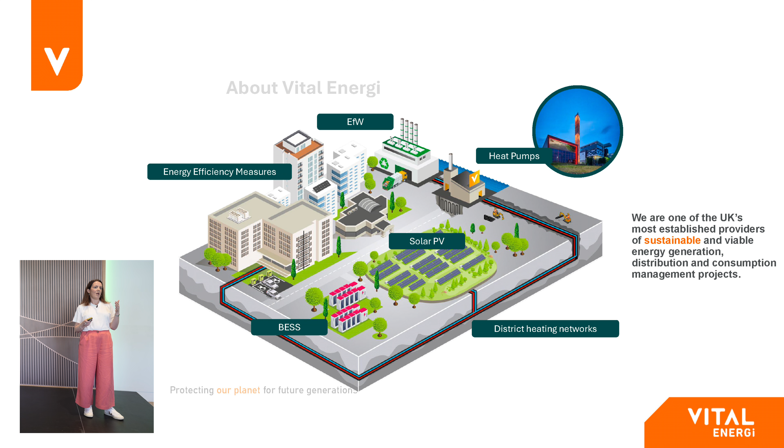We build heat pumps, or we're about to start. We design them, but we're about to start building them. We do solar PV. We're doing BESS. We install energy efficiency measures in buildings, and we own and operate an energy from waste plant in the Midlands, and we're about to start another one in the north of England.

So this is a very small selection of our projects, but it's just to give a bit of an indication of the types of projects and their distribution across the UK. So we've got Torry Heat Network, which is a heat network in Aberdeen, which is taking heat from an energy from waste plant run by Aberdeen Heat and Power. We've got the Queen's Quay Energy Centre in Clydebank, just outside Glasgow, which is Scotland's only river source heat pump.

We have Liverpool Waters, which is similar, so that's been installed by Peel and is another river source heat pump. So these are industrial sized heat pumps where the refrigerant is ammonia. The pumps are being built in Glasgow by a company called Star Refrigeration, and the energy centre has been designed by us. And our headquarters is in Blackburn, so a lot of the work and the IP and everything that's going on with heat is actually being done within the UK.

We've got a heat network in Wales called Dyffryn. We've just replaced that. That was an old heat network that was about 30, 40 years old, and we've gone in and completely replaced it. Our Leeds PIPES project is one of the fastest growing heat networks in the UK. So Leeds City Council started that project about 6 years ago, and we're now up to about 40 kilometres of pipe across the whole of Leeds, with a lot of the municipal buildings attached to it. So the Civic Hall, the Town Hall, the courts, Leeds Playhouse, St James's Hospital.

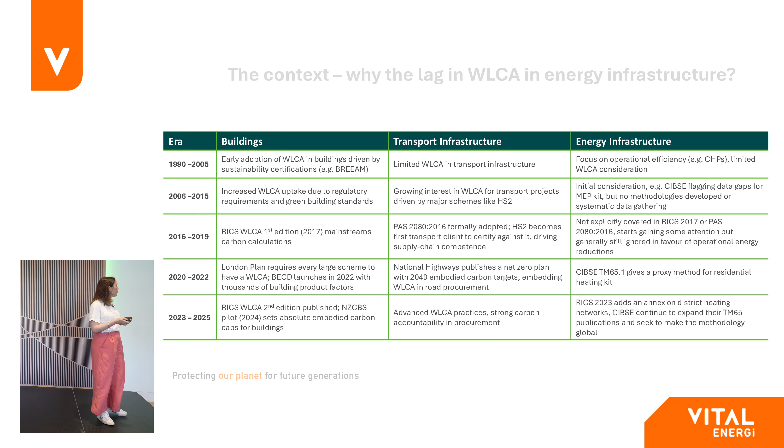But why does it matter? Again, operational energy is only one small part of carbon as a whole. A lot of the work that we do is for public sector organisations, so local authorities, hospitals, universities, and they've declared climate emergencies, they've set net zero targets, and they want to know about their scope 3. So just focusing on operational energy isn't enough.

However, obviously, when we're going in and delivering infrastructure that is going to remove fossil fuels and reduce their scope 1 and 2 to 0, then that operational energy bit might be huge, an order of magnitude bigger than the embodied carbon side of things. I'll come back to that later, but it is an important thing to bear in mind. So yes, it is important to know all of this, but for infrastructure that is decarbonising heat, the operational energy side of things is the end goal.

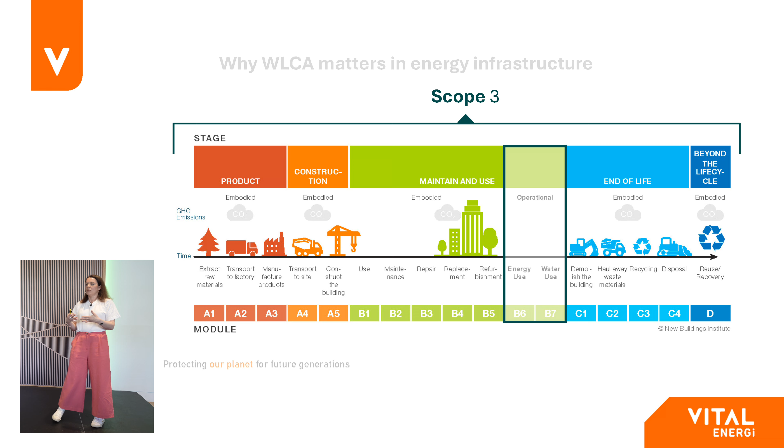But because that was the focus, there's not really been an awful lot of information gathering about all those other areas. So everything in A1 to B5, and then the C and D, and we really need that. We can't ignore it altogether. So we need that information.

So I'm going to talk a little bit about this specific project that we're doing for Lancaster University, because effectively, as I said, Vital have been doing this for 30 years, but no one had asked us for information about embodied carbon until 2 years ago. I started at Vital almost 2 years ago to the day, the 1st of July 2023. And then in August 2023, a tender came in from Lancaster, initially to build a solar farm, and then to deliver what they're calling the LUNZIP, the Lancaster University Net Zero Infrastructure Project.

And that was the first time that we had ever specifically been asked to do an embodied carbon assessment. So my question is, if we'd not been doing it, who is doing it? I think the answer is probably no one, really. But in that 2 years, we're now starting to see it come up, and probably most of the tenders that we're working on right now want some information about embodied carbon. But the problem is they've looked at RICS, they've looked at PAS 2080, they want a target, and we're like, well, actually, we can't really do that.

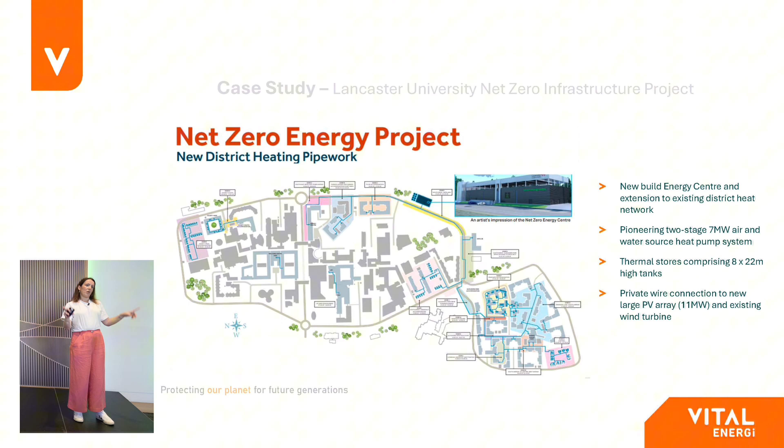Once they've done all of that, that will decarbonise 95% of the university campus, saving them something like 2,700 tonnes of carbon a year. But it's a massively ambitious project. It's sector leading for higher education, and it is really difficult to do a carbon assessment on, but we're trying.

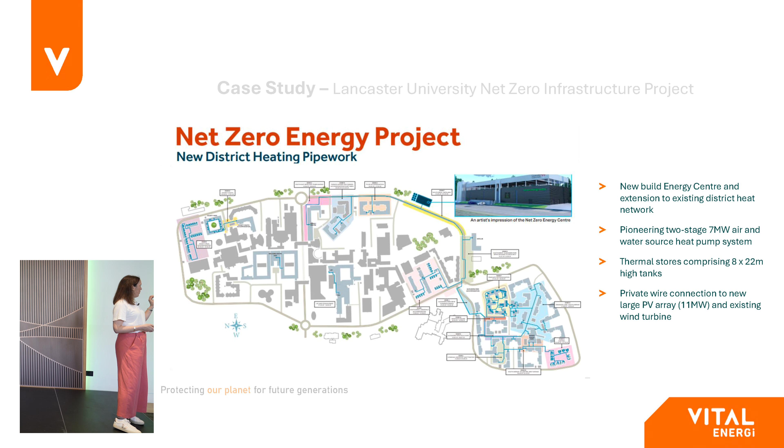When they came and asked us to do the carbon assessment for the solar farm, they said, we want to see case studies, we want to see examples. And we hadn't done it before, so we had to say, right, hands up, we've not done this before. So we appointed Arup to help us. Arup came in and helped us do the whole life carbon assessment for the solar farm.

But we recognised a need to upskill internally. We don't really want to be constantly relying on consultants to do this. But also, we've got over 100 design engineers within our own business. We're a turnkey provider. We should be doing this. We should have this knowledge and expertise. So we did a bit of market testing and identified One Click as the platform of our choice. I presented the case to the board, and they agreed, and that's when we got on board with One Click. That was probably around a year ago.

Since then we've been applying it to LUNZIP, but also some other projects as well. So we'll be doing it for Gatwick because they've got an ambition to become PAS 2080 certified as an asset owner. We are working for TfL, we're doing it for them. Who else are we doing it for at the moment? Yeah, there's lots. So it's really ramping up very, very quickly.

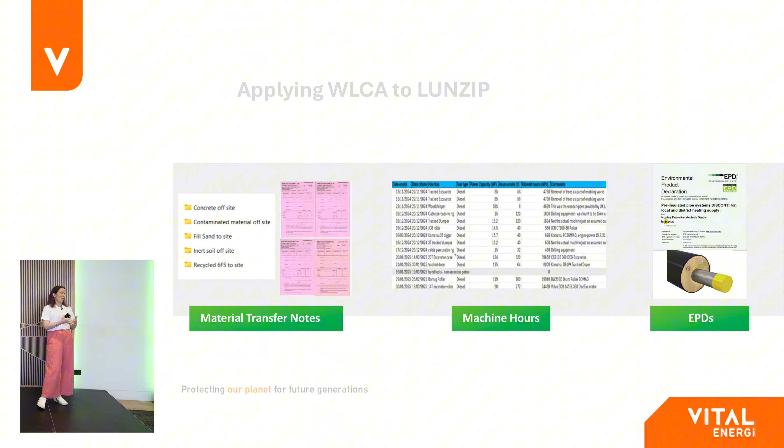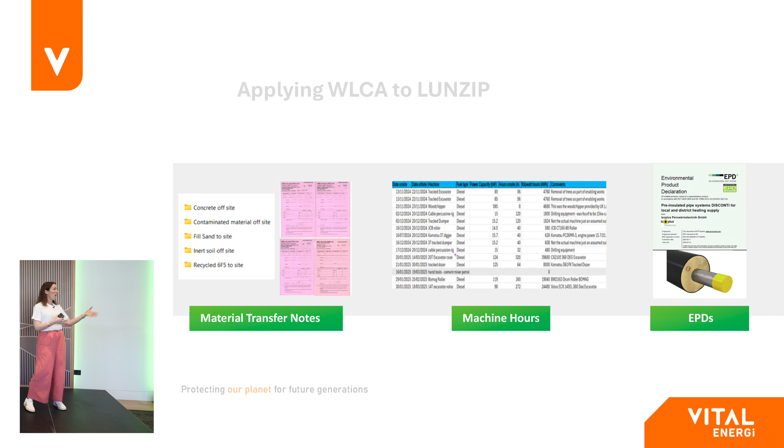And essentially what we're saying to them just now is we are only measuring this right now. Right now, we're just trying to understand where we are. So we're going to ask you for this information. You might not be able to give it to us right now, but we are going to ask you, and we're going to keep asking you. If you need help, come and ask us as the bigger contracting entity, and we will help you, or get help from someone else, whatever you do. But we're going to keep asking the question. This isn't going to go away.

So if you're not currently geared up to do this, then you need to get there, because although we're asking right now, there will come a point sometime in the future, probably not that far away, where we will be making decisions because we'll be forced to, because we might not get work if we don't do that. Recording machine hours is another thing that's a bit of a challenge, and EPDs, it's been talked about lots.

But we've had some really encouraging examples as well. So that EPD there is from Isoplus, who provide our pipe. And it turned out that they had EPDs for the exact product that we were buying from them, which was great, but it wasn't in the One Click library, but it will be now. So that's a big win. We're really chuffed with that.

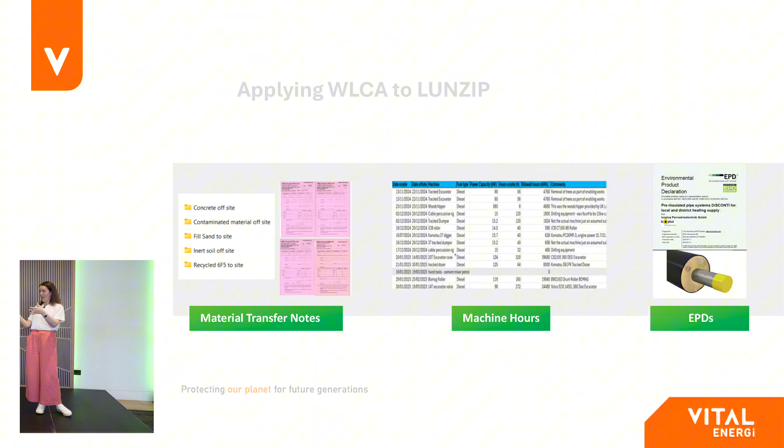And this is part of the challenge, because when we're looking at these things, we've not got to the point yet. We are putting the pipe work in the ground, and we've done the piling for the energy centre and the thermal store bases, but that's as far as we've got. So we're not into the energy centre and putting the MEP in and looking at the heat pumps and all of that sort of stuff. But we already know, because we've started to ask suppliers for this information, that very, very few of them have done the EPDs, and there aren't really that many in the library either for the specialised kit that we're using.

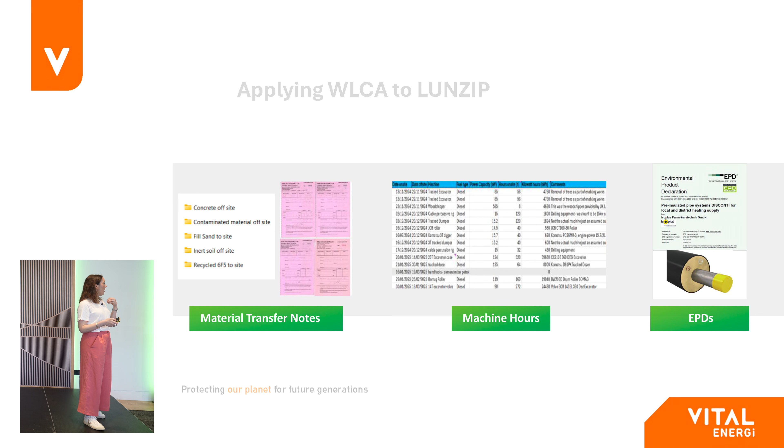So part of that raising the bar is this. We want there to be more, we want our work and our relationship with One Click to be generating more of this information that will go into the EPD library, that will go into the tool, that will go into developing the platform in a way that makes it better at doing the specific types of energy infrastructure projects that we are delivering. So that's our key challenges and lessons learned.

The data gaps for MEP, again, been talked about. Simon just talked about it earlier, RICS and the limitations of RICS. So there's a number, some of which have already been highlighted. So we have referred to RICS, but we are not using the pro forma because basically we can't. So things like the 60-year reference study period don't really work for us. We can apply them to the building.

We could apply them to the pipe work, arguably. But because it makes an assumption that you replace things like for like over the lifetime, there is absolutely no way that a heat pump that we're putting in now, with a 15 to 20-year lifespan, is going to be replaced by a like-for-like heat pump. That's just not going to happen. We are innovating heat pumps right now. We're working with Birmingham University to develop a new thermal store material that will basically be the size of this. So there's no point in doing an embodied carbon assessment that says this heat pump that I'm putting in now is going to be replaced 4 times in the lifespan of this energy centre, because that's not going to happen.